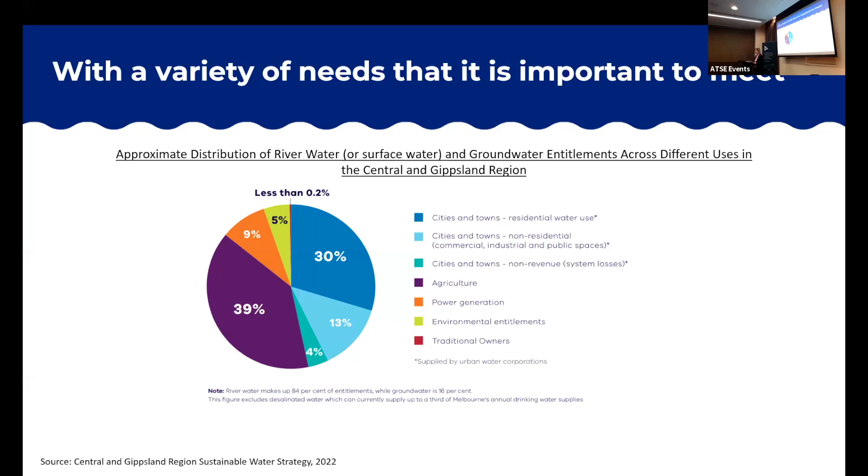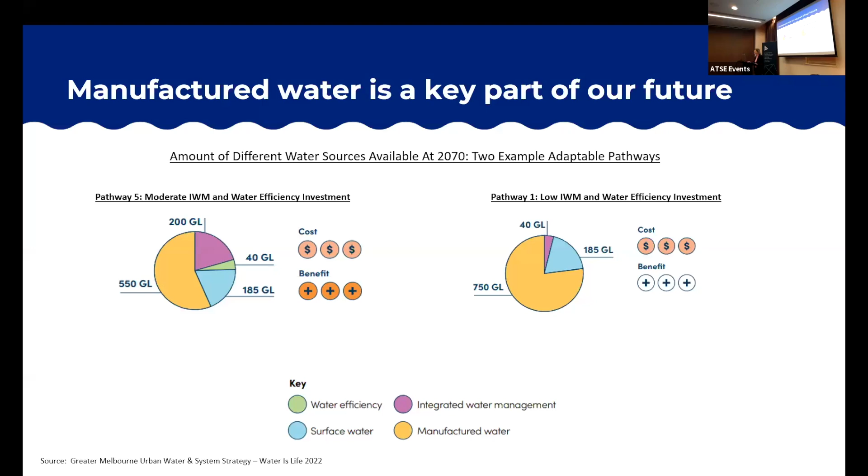It's not all doom and gloom. The good news is that all of the technologies for this we already have, and they're increasingly getting better. Also, the broader water sector is involved in a lot of the solutions associated with climate change as well.

I think the exciting part is that most of the water corporations, certainly in Victoria, have a net zero target by 2030, with a number of them looking to beat it before then. Across the world now, the water sector is really focused on what it can do to lower its emissions. So increasingly, we are seeing a focus on net zero treatment plants, using a range of really innovative technologies, focusing on nitrous oxide through both biological and chemical processes, really trying to drive that down, given the design life of our treatment plants is often 50 to 60 years.

We've seen some other great technology. SA Water has looked at all of its pumping stations. We ourselves have hundreds of pumping stations, looking at both when they can pump that water to play on the energy market, and also having generation at each of those pump stations to make it zero cost and, where possible, zero emissions.

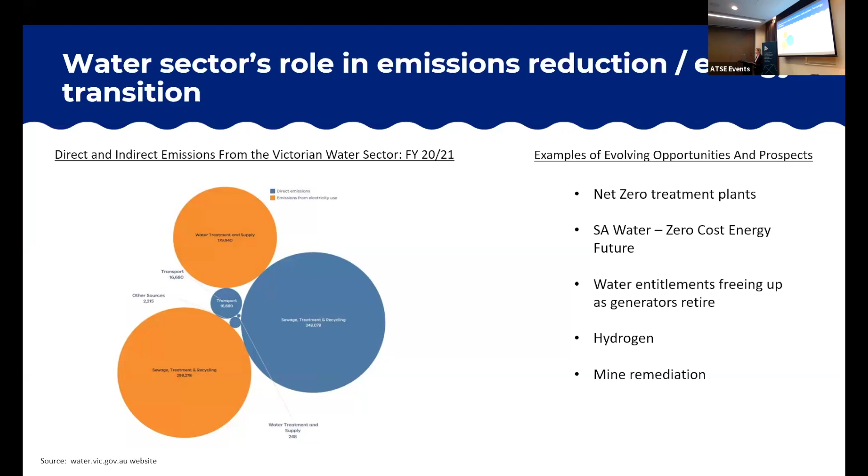There's also a lot of exciting technology and research. One of my colleagues, Li Gao, is here tonight. Li, can you give a wave? So perfect. Who's been working on this area.

One of the areas we're most excited about, working with RMIT and other water corporations, is pyrolysis technology to turn biosolids, which is dried sewage, into biochar. This is key partly due to the costs of biosolids, which is predominantly water, but mostly because those biosolids contain PFAS. As we understand the implications of this forever chemical, applying biosolids to farmland and agriculture is no longer something we look to do unless we can control that PFAS.

It's fantastic technology that has come from Victoria. A pilot plant has removed 99.99% of the PFAS in both the biosolids and in the gas. We are now scaling up to build the first production plant, and it's closely watched around the world, because PFAS in biosolids is not only an issue here, but also in the US and Europe.

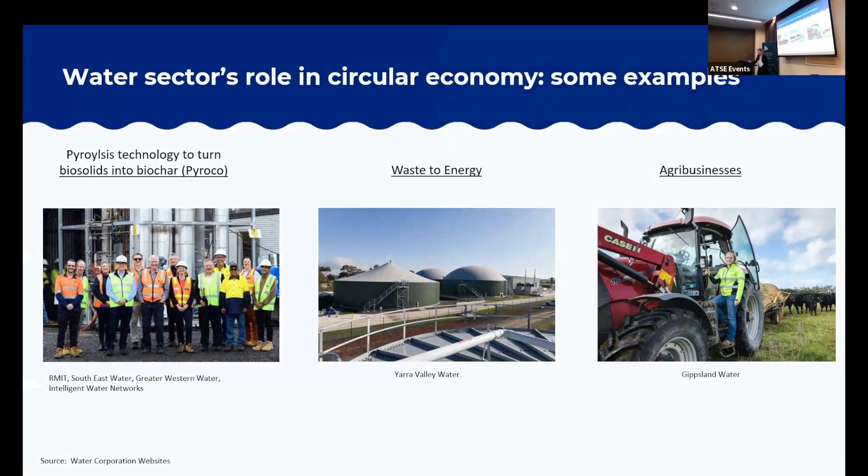Now we welcome Professor Huanting Wang. Huanting is an ARC Laureate Fellow and Sir John Monash Distinguished Professor in the Department of Chemical and Biological Engineering at Monash University. His research focuses on advanced membranes and nanomaterials for gas separation, water desalination and purification, chiral separation, ion transport and separation, fuel cells, and electrolysis. Huanting has published 460 journal papers and has patents transferred to and commercialized by industry. He is a fellow of FTSE, the Royal Society of Chemistry, and the American Institute of Chemical Engineering. Today he's going to share smart materials and membranes for water desalination and resource recovery. Welcome.

Thank you for the introduction and hello everyone. It's great to be here to talk about what I do. Today I'm going to focus on water and resource related topics. My background is materials science engineering, so I'll talk a lot about materials, covering water purification and resource recovery from a chemical engineering perspective.

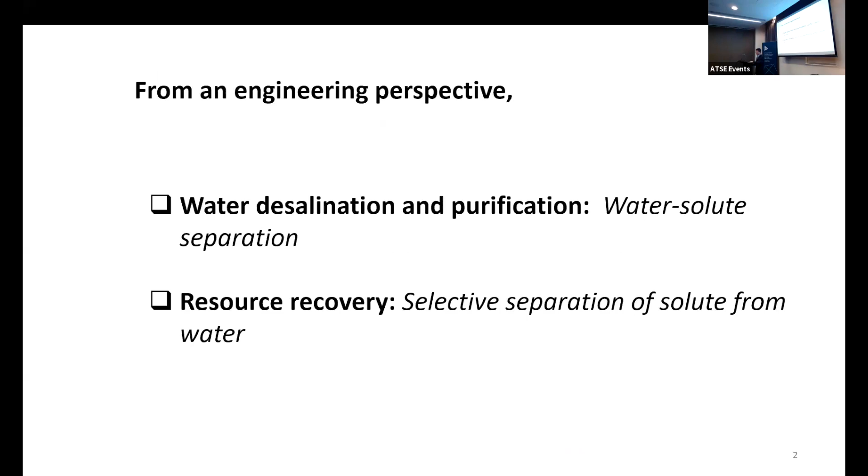Water desalination and purification is essentially water-solute separation, so how do we actually separate them? Resource recovery is basically selective separation, we want to get something specific out of the water, not all of it. So that's the separation and recovery question, and then how do we do that?

There are different mechanisms we can use. Filtration is a simple one: you have a porous material with small pores, and anything larger than the pores gets removed. There's also evaporation, especially in the membrane area, where people are doing a lot of work on membrane distillation, where water evaporates through the membrane and then condenses to produce pure water. And there's also the adsorption process, where a porous material with small pores adsorbs contaminant ions, which we can then recover from the water.

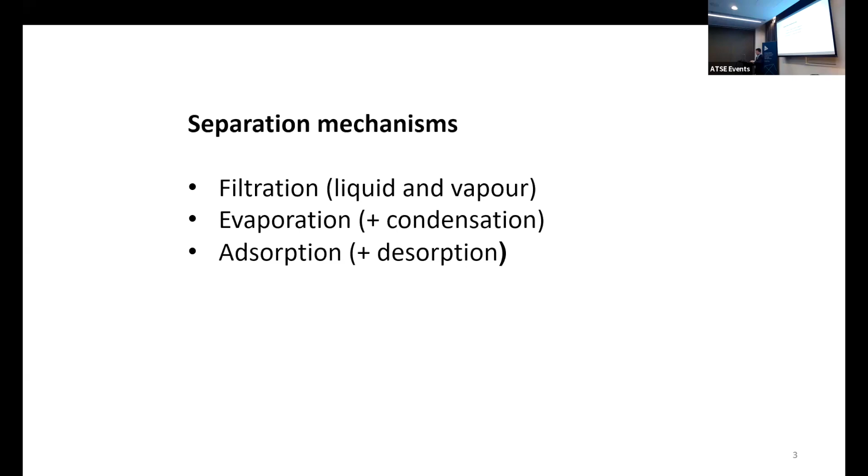So that's three different main mechanisms we can use. Let me start with membrane-based water desalination, and then lithium recovery.

Laura already mentioned desalination. The membrane desalination process, what we call reverse osmosis, RO process, right? So the seawater is drawn into the desalination plant. Then we have a pre-treatment to remove suspended particles and microorganisms from the water. And then the water is pumped into the membrane module, that's called RO module.

So the membrane is doing really well because it can remove 99.8 or even higher percent of salt out of water. So the water coming out of the membrane module is actually very, very pure, high purity water. And that's not very good.

So for making it drinkable, we inject minerals back into the high purity water. People talk about the energy consumption of RO process. It's all about, because in the process, very high pressure is required to push water through the membranes. So that's why the process consumes a lot of energy, electricity.

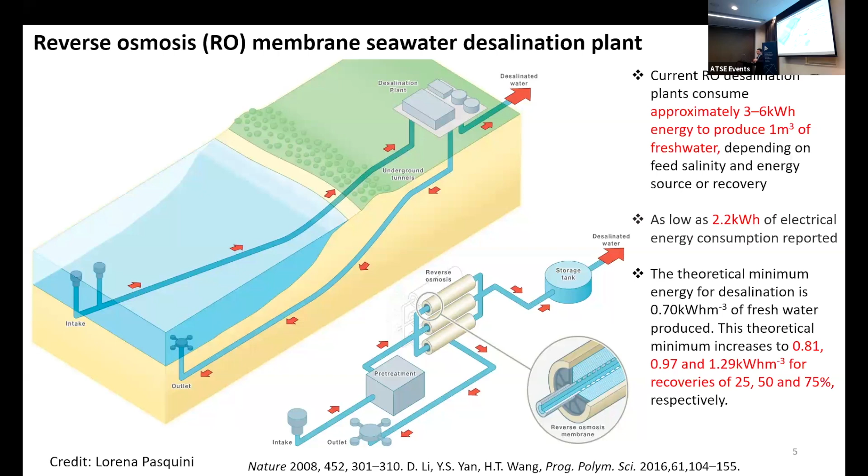Theoretically, we don't really need that much energy. So that's why the process needs to be developed, improved, and the material also needs to be improved. I just highlighted one recent breakthrough published in Science, not my group.

You see the author there, right? So people have been looking at different materials for RO process. We all know in the field that polyamide is the typical gold standard for the industry. But now a new type of material, polyester, has actually been developed.

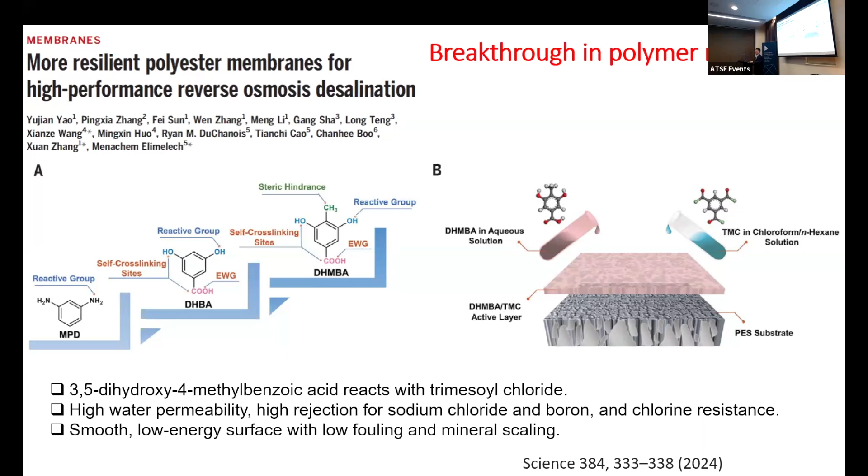So the only difference is in the biochemistry, just a different monomer in the process. And the material produced through that monomer actually works much better than the polyamide. Polyamide has been around for like over half a century, many years now.

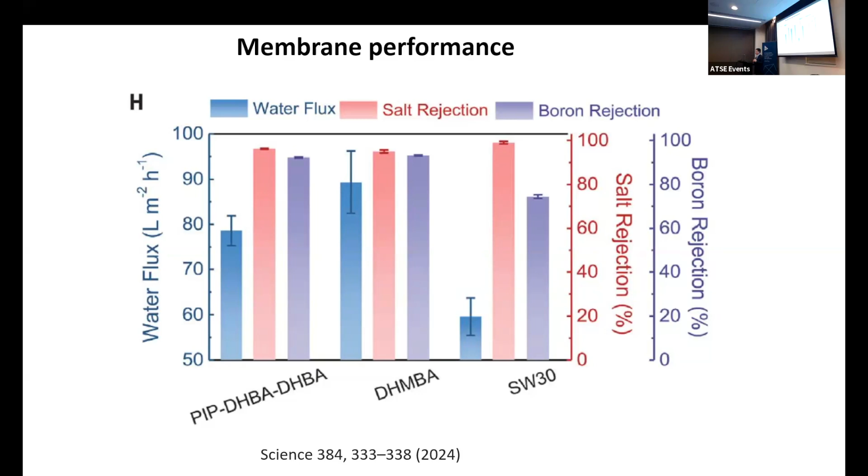In terms of performance, three parameters are very important: water flux, how much water can flow through the membranes, salt rejection, how much salt is being rejected, and another very important one is boron. Polyamide is not very good at rejecting boron, but now the new material can reject boron quite well, so that's good.

Also, chlorine resistance is very, very important for the membranes, because in the process chlorine is often injected to prevent biofouling of the membranes. Polyamide is not very stable in chlorine, so that's the problem, and it makes the process more complex. But now the new membrane can be very, very stable.

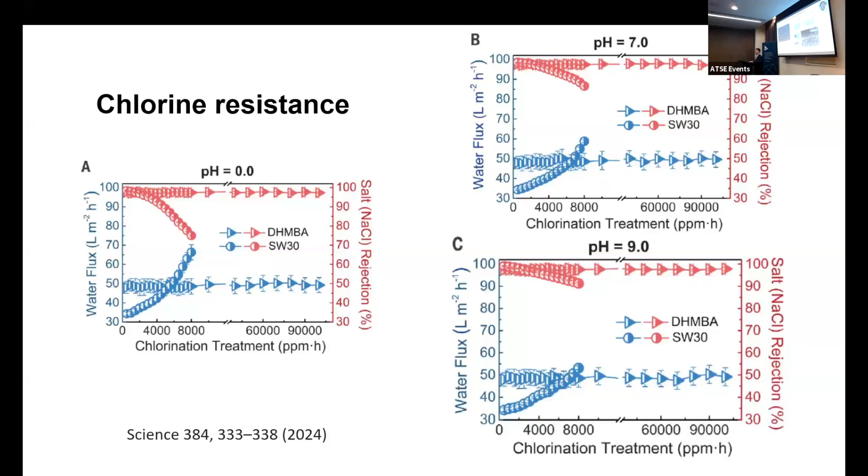And then another new material, it's graphene, people talk about 2D material, two-dimensional material. In the materials science area, people are looking at a lot of different new materials. Graphene is just like an atomic thin carbon layer. By itself it doesn't permeate anything, it's non-porous.

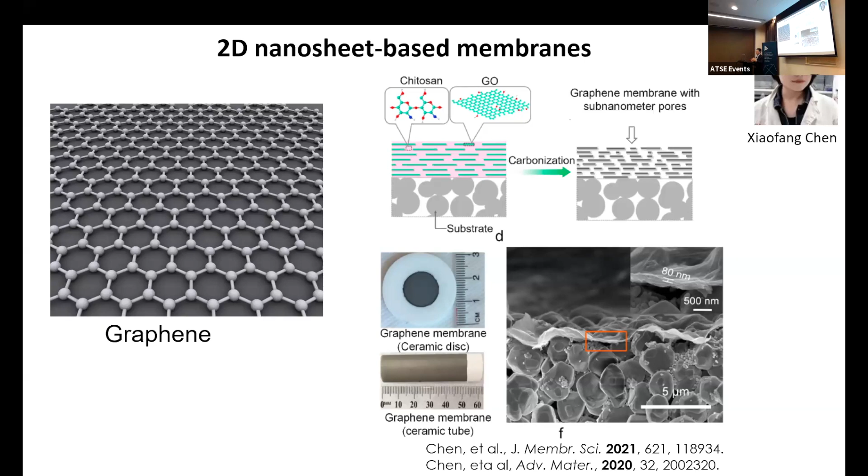But by processing graphene into the membranes, we create a lot of small pores, and also interlayers, layer by layer, so the water can go through it. So that's what we've got, one example. We can make that into a ceramic disc or ceramic tube, because we use a high temperature process.

I just want to compare the graphene membranes, because these are all still in the lab, not commercialized yet. Of course we are doing a lot of work, other groups also doing a lot of work to try to commercialize this kind of membrane. So I just put the comparison there.

So graphene membrane compared with commercial PTFE membrane, you can see that the flux is much higher. That's for the membrane distillation process, especially important for near zero liquid discharge processes, because you can remove 90% of the water or even higher, so very little wastewater is produced in the process.

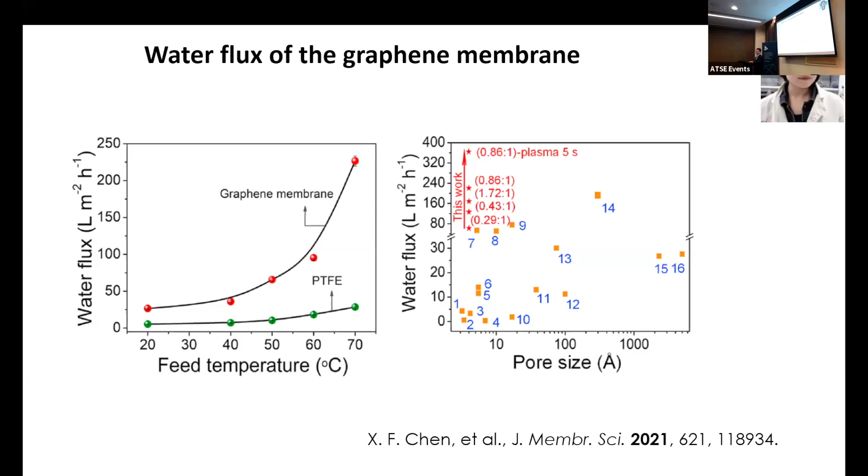And then for materials, we play with a lot of different materials. The previous case was just graphene.

And then we also look at other materials, like MXene, for example, that's a very common one. We combine them together, so you can see we get one layer graphene, one layer MXene, and then graphene and MXene. So the pore structure is a heterogeneous heterostructure, right?

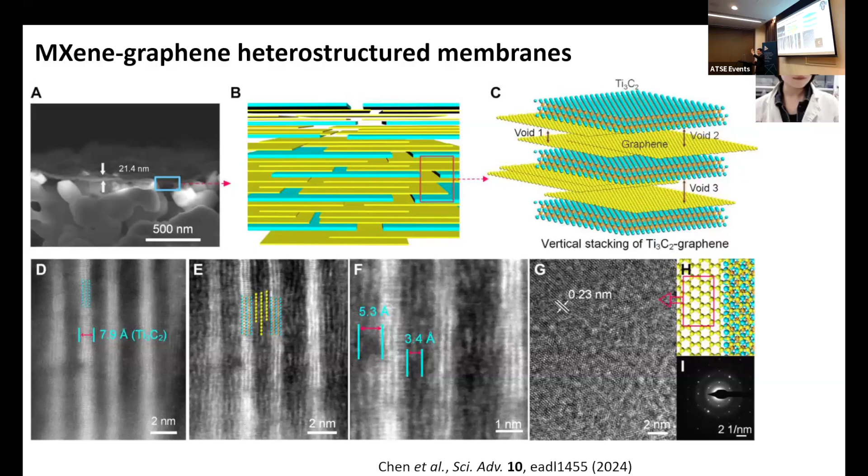So that's quite interesting because fundamentally you can see the TEM, that's a real image, okay, a high resolution TEM. You can see the materials like one layer, this one layer up, right? So quite interesting, right? So then we found this kind of material actually has very different properties.

So then water goes into the small pores, and the density and viscosity all change, right? That's why this kind of membrane actually has the potential to have a very high flux, because the water density and viscosity all change. And also this kind of membrane works very well for organic solvents.

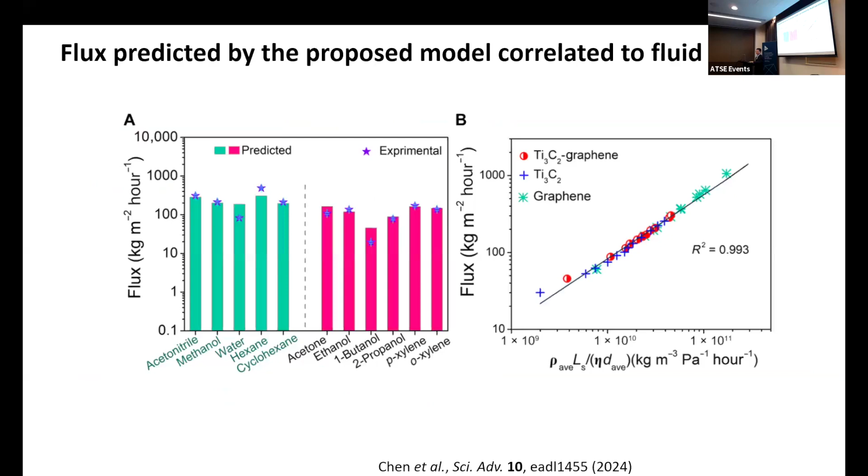So that's probably the next step, organic solvent, not much research on that. We have done better work with that. I'm going to skip this. And then the next one is about resource recovery, so I'll give lithium extraction as an example.

A lot of the lithium we use in lithium batteries now is extracted from spodumene rocks, particularly in Australia. And also half of it is extracted from brine, mostly in South America.

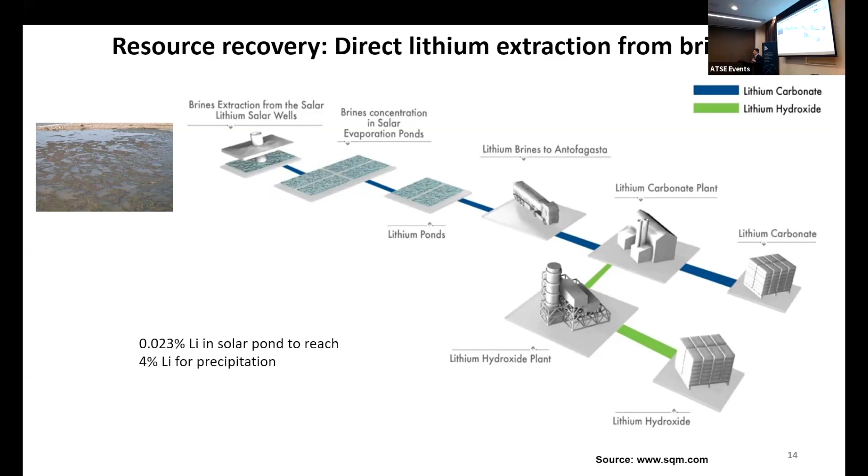The process to do this is basically a very traditional method, using solar ponds, solar evaporation. It takes like 6 months to 2 years to get enough concentration, and then you use a chemical like sodium carbonate to precipitate lithium. So the process takes a very long time, and also it consumes lots of chemicals and produces lots of chemical waste.

That's why we've been looking at developing membranes. Monash has a startup company called Electrolyte, and they try to commercialize the membrane we develop in the lab. Not this material, but I just want to show you an example. We basically look at different porous materials, and with the chemistry involved,

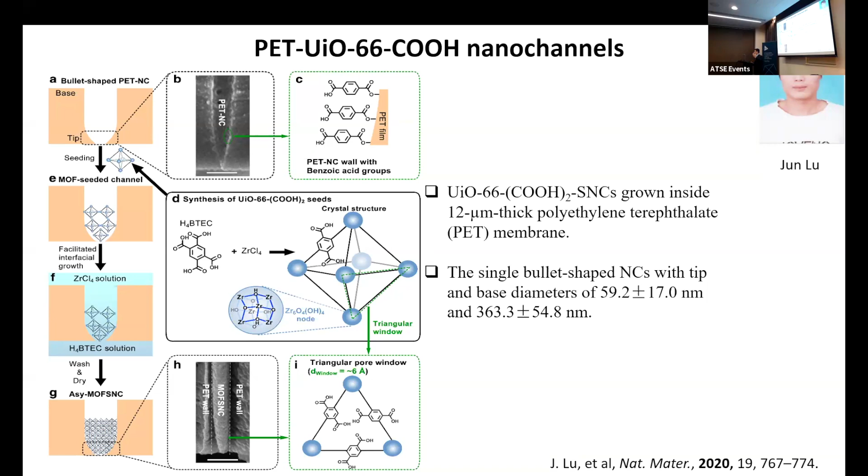with the small pores, the windows, lithium, or sodium, what we call monovalent ions, can go through a lot faster than magnesium ions. Because in the brine, there's very often a problem with magnesium, because when you do the precipitation, you precipitate lithium with magnesium and get a mixture. That's why we need a membrane to take magnesium out first before you do the precipitation.

So that's what we're trying to do. We tested different metal ions: lithium, sodium, potassium, magnesium, and calcium. You can see the membrane actually transports ions in one direction, but in the other direction there's no transport. The magnesium ion has a very low current, which means the magnesium ion is blocked almost 100%. So that's a really interesting material.

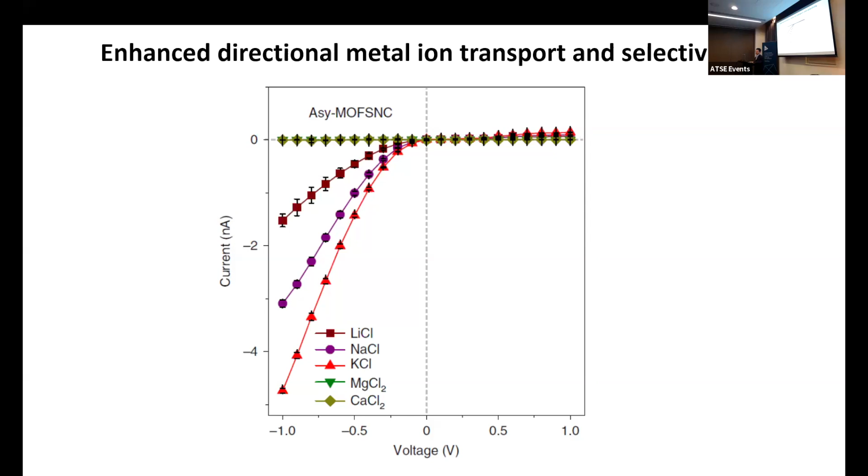We also look at other materials, because of lithium-ion batteries, especially now the solid lithium-ion battery being developed, because it's safer. We're trying to use the solid electrolyte developed for lithium-ion batteries to do the lithium separation, because those materials are really highly permeable to lithium ions. The question is, can we actually use it for separation? Because lithium ion can go through really quickly, but we want to block others, only lithium goes through it. So that's what we've been doing.

We develop the membranes and only allow lithium to go through it, rejecting all others. The company I mentioned, Electrolyte, is actually commercializing this material, and hopefully in the next few years we can see something come out of it.

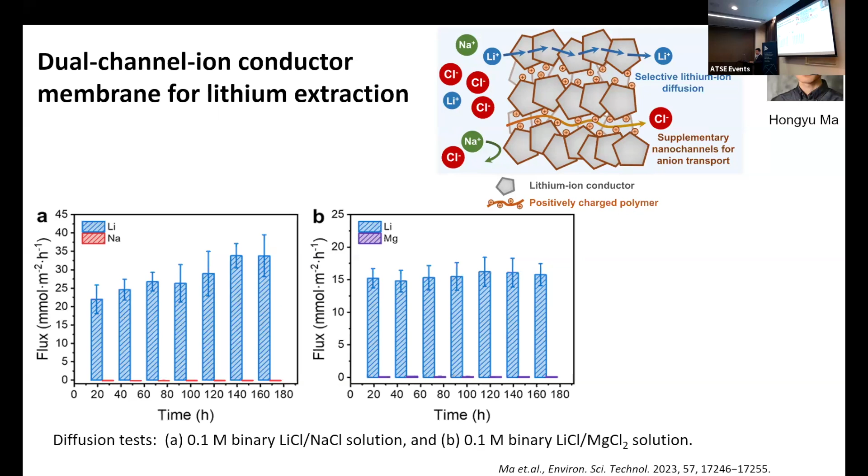Another thing I want to mention is ammonium recovery from wastewater. Lee, sitting there, recently received an ARC industry fellowship through Monash University, and I copied all these numbers from his proposal. You can see there's a lot of ammonium in wastewater.

Swine wastewater, landfill leachate. If we recover all the ammonium from wastewater, that can meet almost 20% of the total ammonium demand for the Australian agriculture industry. So that's quite significant. But the problem is, how do you actually recover it with very low energy consumption? That's what we're trying to do - we're trying to develop ammonium selective membranes.

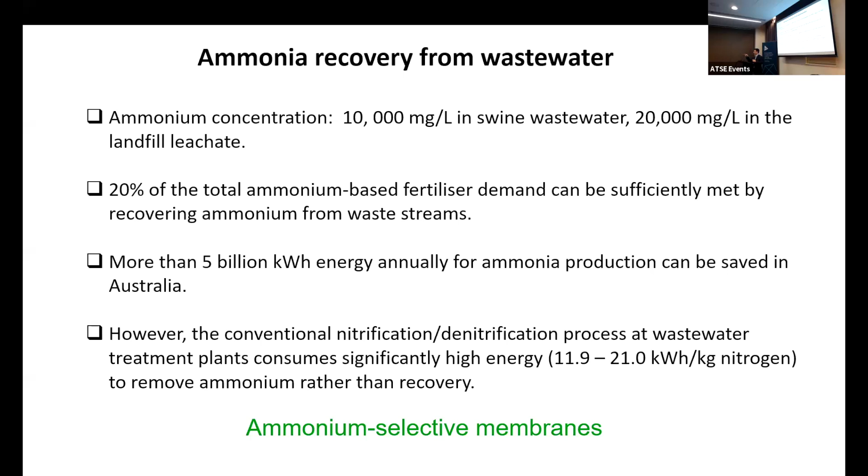Now the small materials for desalination and lithium recovery. I mentioned that solar evaporation pond - we've seen this being used for many years. If you look at the solar pond and the temperature gradient, the sunlight goes through the water down to the bottom, and the temperature at the bottom is higher than at the surface. But in chemical engineering we know that's not good, because we want water to evaporate from the surface, not the bottom - because no matter how hot the bottom is, water cannot evaporate from there.

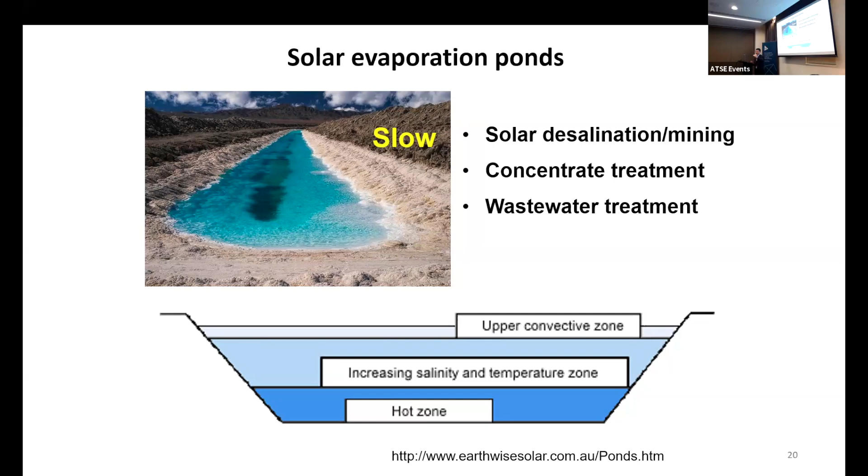So many years ago, my student joined me from Peking University, and we came up with the idea: can we do something differently? What we did was develop a material which can absorb sunlight very effectively and also float on the surface. If we can do that, we can actually improve the water evaporation rate.

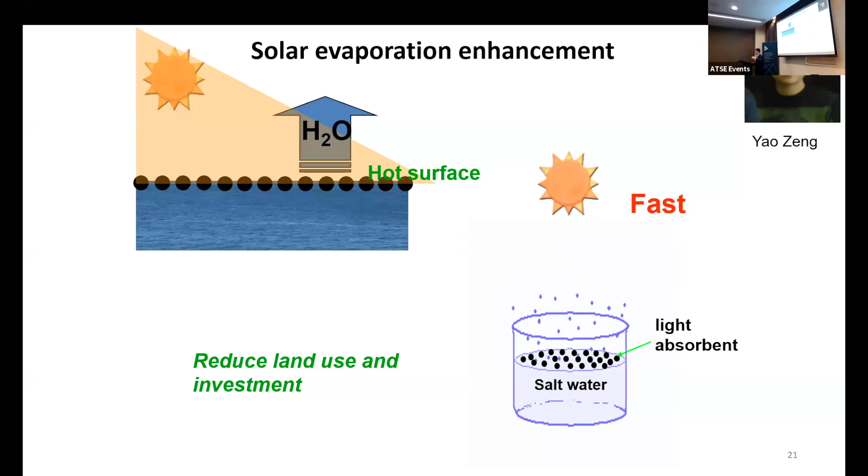In the lab, it's a very simple approach - we just use carbon, which is very cheap, and we also added iron oxide. The reason for that is iron oxide is magnetic, so we can recycle it using a magnetic field, and it's a very cheap material. Why can carbon float on water? Because we make it porous - it's a highly porous material. And on the surface, you can see the contact angle - it's hydrophobic, which is why the carbon can actually float on the surface.

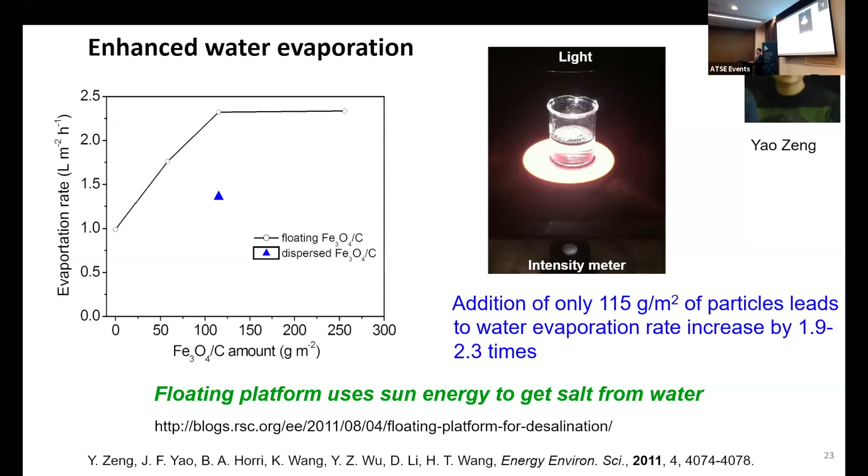That was quite interesting - I didn't realize it at the time, and afterward I stopped doing this work. Now I find a lot of other people have started doing it. At conferences I often get asked, why did you stop? So many people are following your work now. Recently I saw a review article published in Advanced Materials showing this area has grown significantly - thousands of papers published after us. That's good, at least people are doing it now, and you can see a lot of applications.

This is what people call interfacial solar evaporation, because it's a very simple change. Basically, instead of heating the bottom water, we now heat the surface water. That's all - that's what we do.

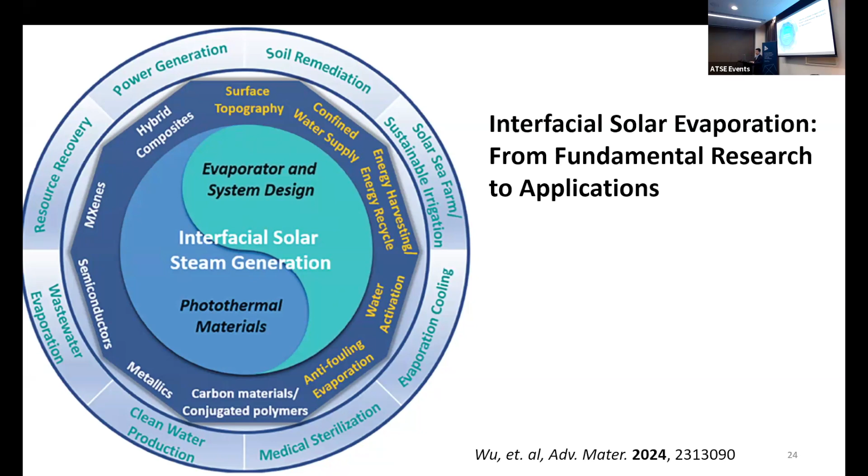A couple more slides - we also developed an absorbent material, similar to the material I showed you for ion transport. That's the metal organic coordination polymer, a crystalline material, like crystals. We functionalize it by putting an organic functional group into the pores.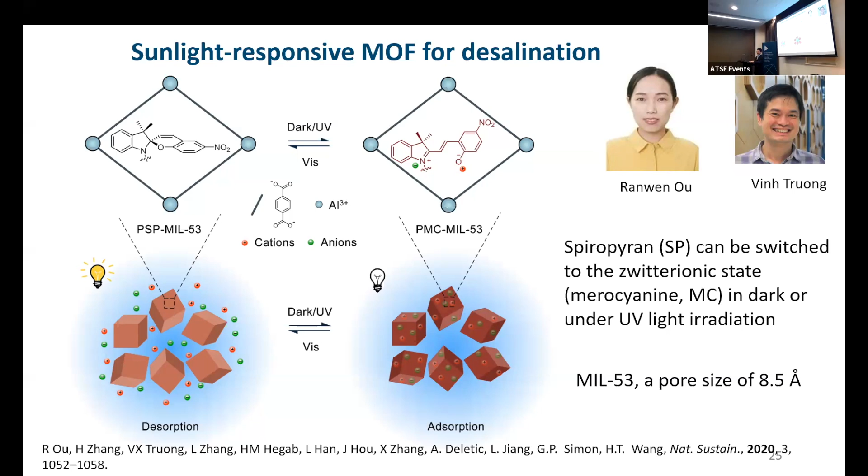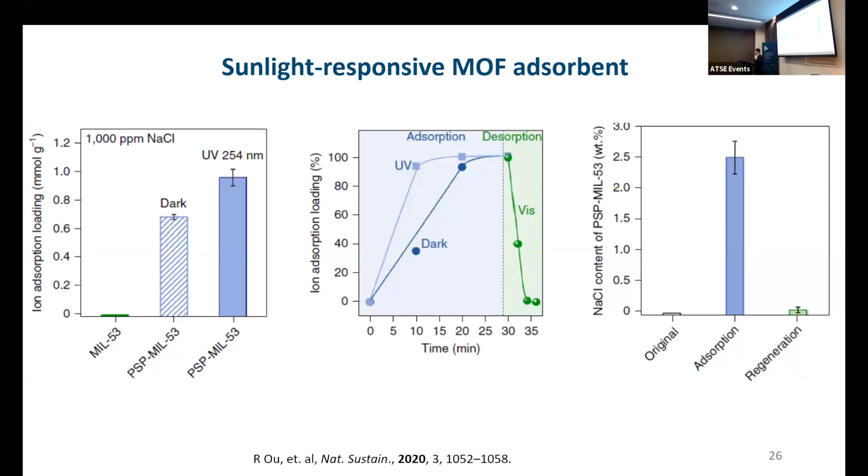So that's quite interesting. We did this in the lab and found we can actually remove salt from water quite effectively. And then we can also regenerate the absorbent - you can see that within a few minutes, we can actually wash the salt out of the material.

That's a very interesting concept. And the question is, how do we actually do this on a large scale? We can imagine having a lot of columns - water flows through and salt is taken out, until saturation, and then we stop and do that on another column. We can regenerate that column just by using light. So that's quite interesting, to actually remove salt from water and produce pure water.

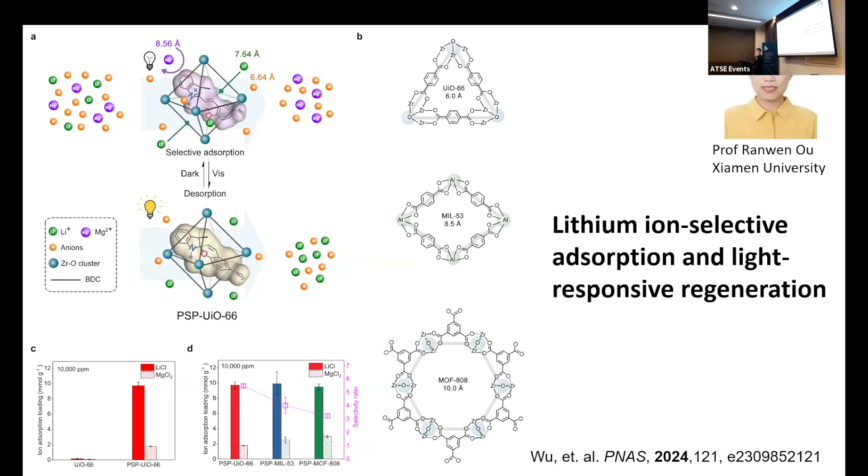One more slide - this material can actually be functionalized to absorb lithium in particular, because if we have the right structure, the material can be selective. That's something we've been trying to do for a long time, and finally we got the material. In the previous case, the material was not selective to different salts - it just took all the salt out. But now we want the material to be selective, to recover lithium from water.

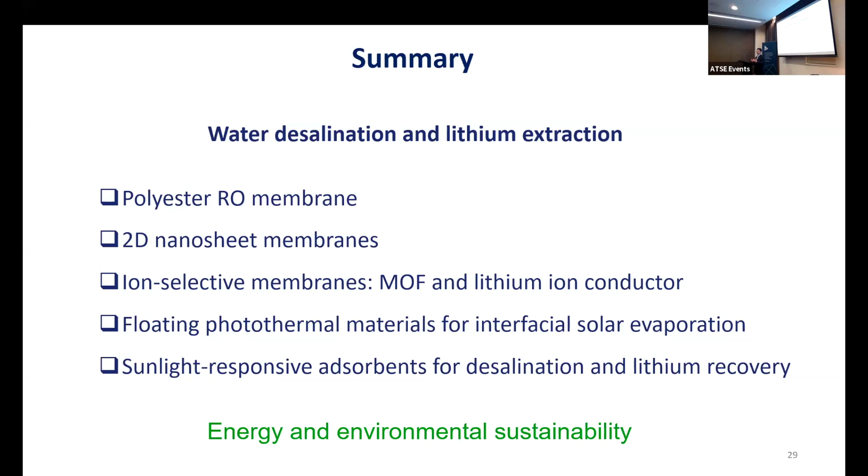I hope it's not too boring, and I've given you enough examples. So basically, today I just wanted to highlight some of the new developments, emerging technology in the water related area - membranes, absorbents, and using renewable energies like solar to do a lot of separation. Thank you very much.